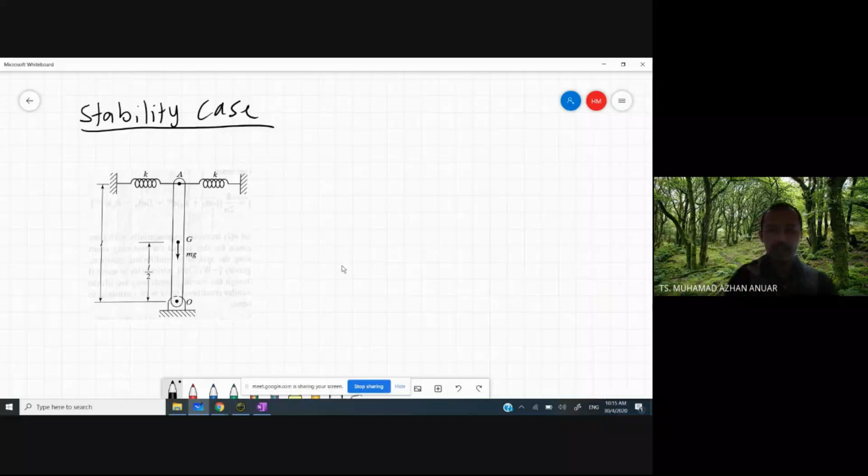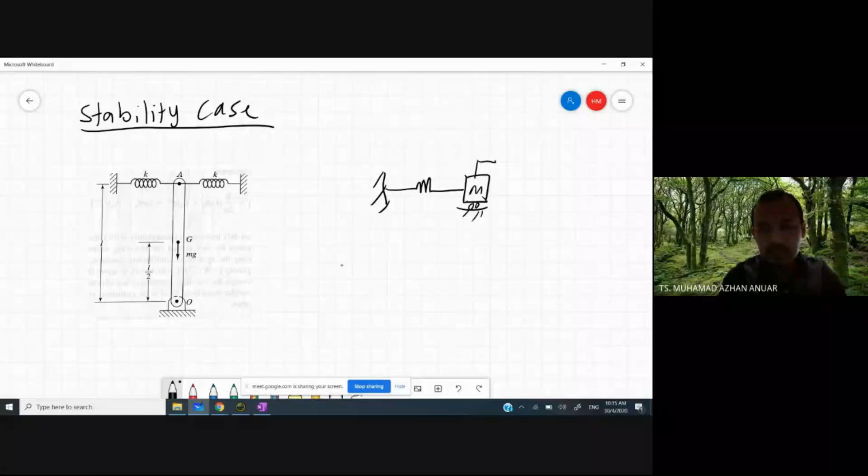bergerak. Okay, for example, if you have a spring, so let's say we know that the system is moving in this direction. For example, like this case, okay, moving to the right. This case is moving to the right.

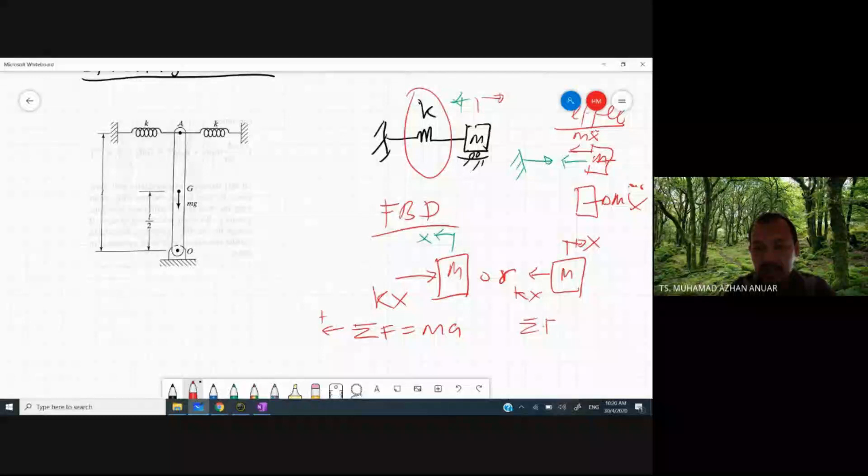So jawapan dia tetap sama, MX double dot plus KX is equal to 0. Similarly here you akan dapat minus KX is equal to MX double dot. You akan dapat the same answer. Okay, the same answer.

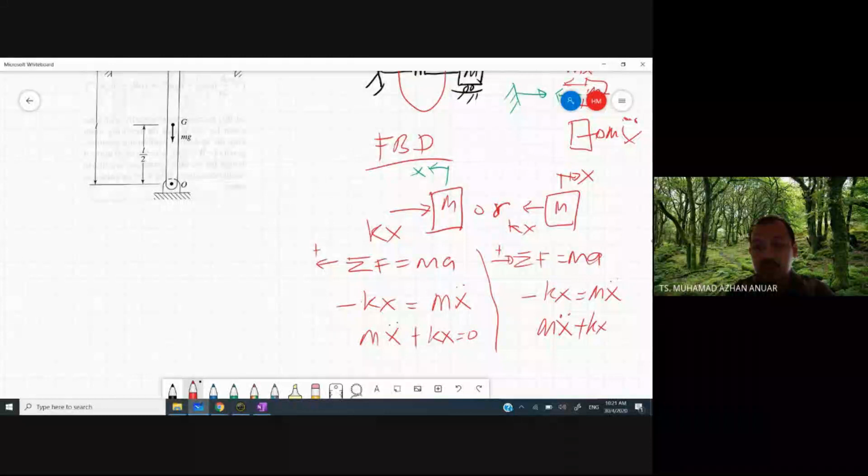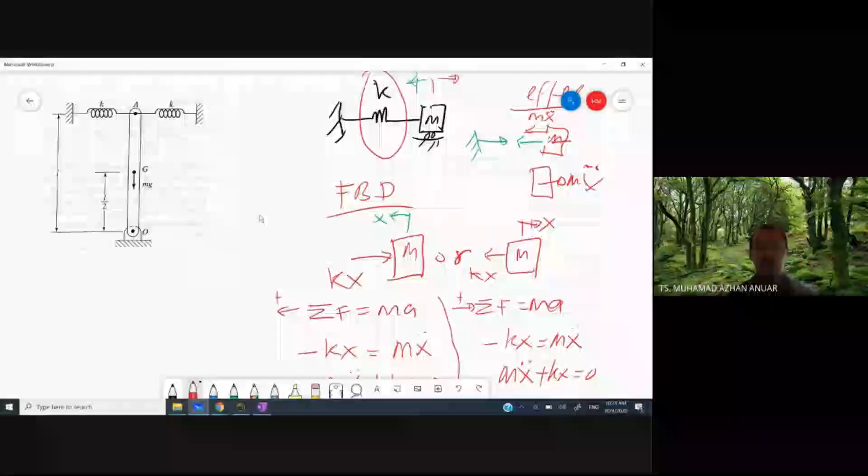Alright, so it is up to you to decide which direction ataupun this system will move, or which one is the positive direction for the coordinate system that you're going to apply for the systems. Yang itu you can decide if it is not given in the question. But if it is given, then you have to follow back the coordinate system in the question. Okay, so hopefully clear macam mana you decide.

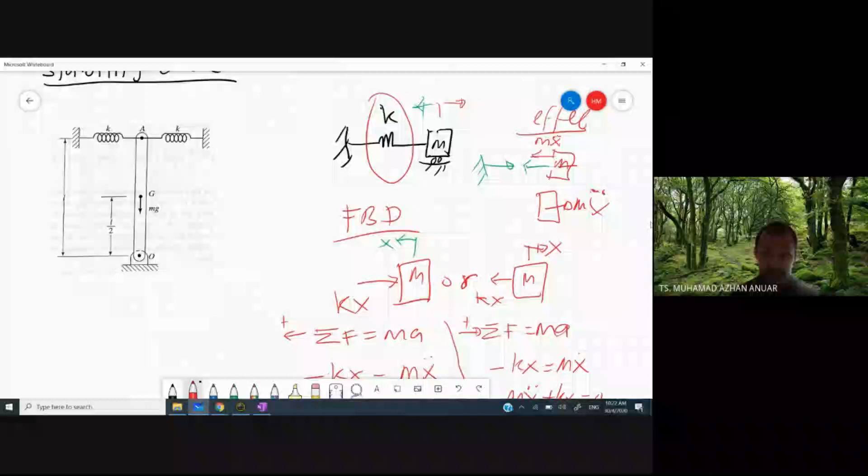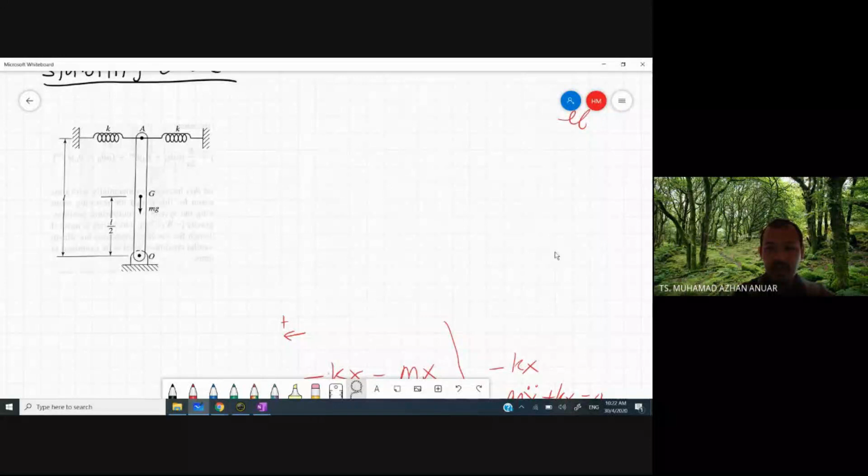For damping, it's similar. So first you tengok system tu move macam mana, and then you tengok damping ataupun spring tadi in compression ataupun in tension, and then bila lukis FBD step number 1, you draw back dia punya reaction. Kalau dalam reality dia in tension, FBD dia akan jadi in compression; in reality dia in compression, in FBD dia akan jadi in tension. Alright, so that is how we decide ataupun we select untuk draw the free body, untuk kita set the positive direction of the system. Right, ada any other question?

Okay, itu step number 1, to sketch free body diagram. And then step number 2, select the equation of motion, sama ada summation of forces is equal to MA or summation of moment is equal to I theta double dot. And then step number 3, we use step 1 and step 2 to determine the equation of motion ataupun the mathematical model of the systems.

And then step number 4, we're going to do it today, which is to get the response of the system ataupun dalam istilah matematik kita panggil to get the solution of the equation of motion. Okay, so it is similar lah. Alright, so itu yang kita akan buat hari ni.

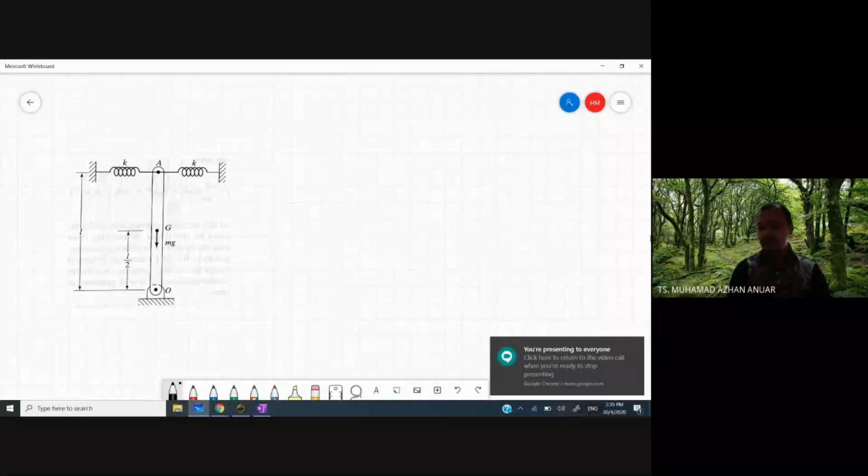So there's one thing yang saya nak mention before this, I've mentioned this before. So how we should sketch the forces in the FBD. So if let's say we have a system here. Alright, so in this system, we don't know whether this block M is moving to the right or moving to the left. So we can make our own assumption here.

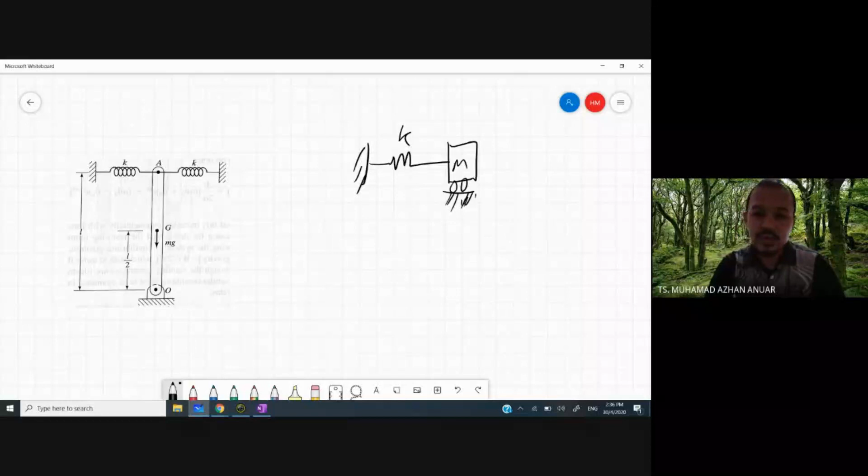So let's say we put the coordinate to the left as X, or we put the coordinate to the right, saya pakai blue color, as X here. Either one, okay? So I separate it into two sections here. If we use the coordinate system positive to the left hand side here, when this block moves to the left hand side, what happens to the spring? Spring will experience tension, correct? Compression. Spring will experience compression.

So when this spring experiences compression, when you sketch the free body diagram, you should sketch the reaction of the spring. So when the spring is in compression, it will react in tension. But for this case, when this block moves to the right, this spring will experience tension. So when the spring experiences tension, you should draw the reaction of the spring in compression.

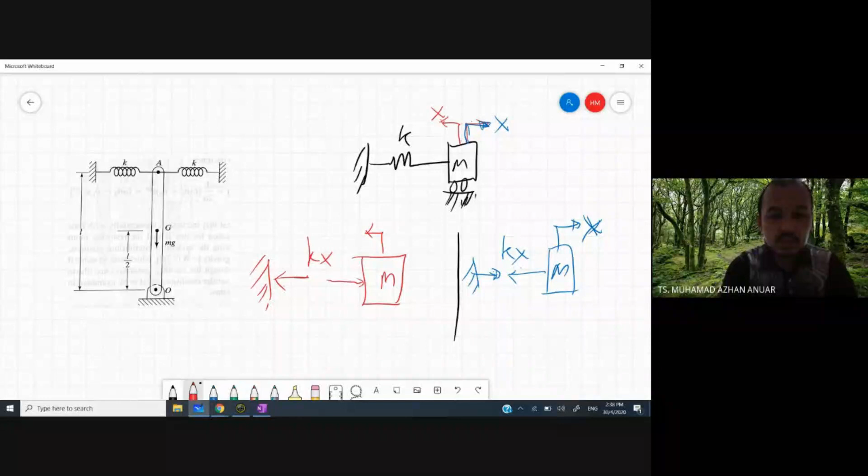So how we write the equation? So this is equal to Kx. This one is also equal to Kx. Alright, so as I mentioned before, this side we are not really interested to know because it is attached to the fixed end. So you will have this one here. This is X, that is X.

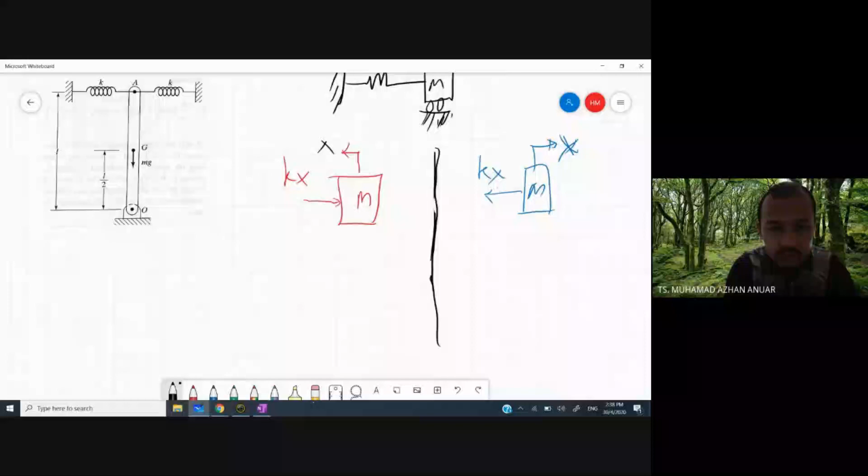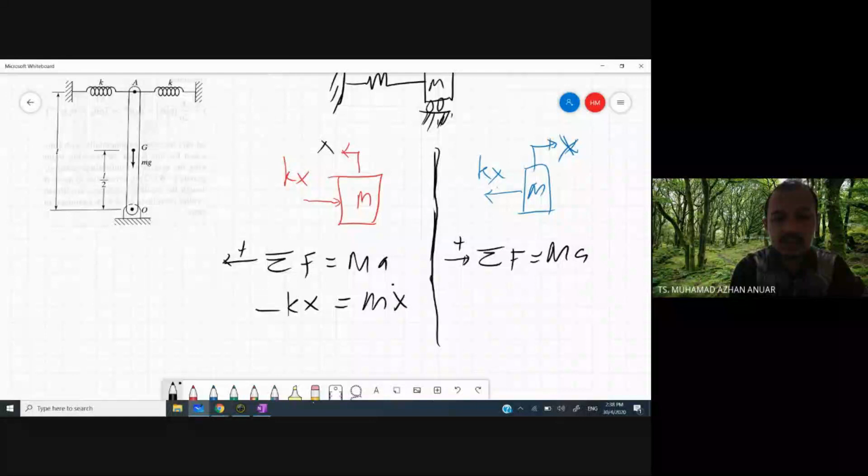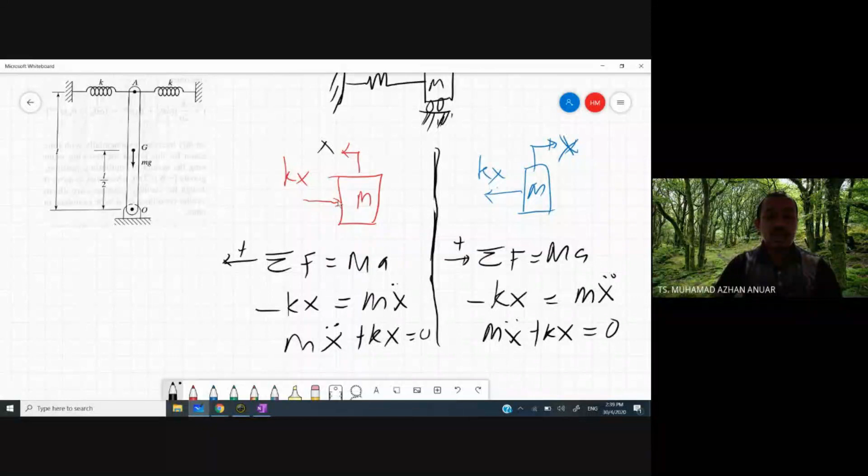Summation of forces is equal to MA, to the left is positive. This one is summation of forces is equal to MA, to the right is positive. So you should have minus Kx is equal to mx double dot. Also here you have minus Kx is equal to mx double dot. Then finally you have mx double dot plus Kx is equal to 0, and this one also mx double dot plus Kx is equal to 0. So it really doesn't matter how you select the coordinate systems as long as you apply the right reaction force on the spring.

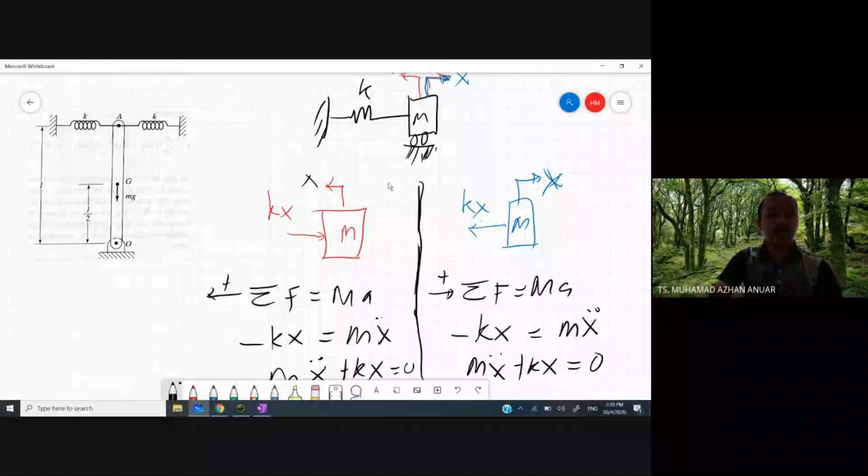If the question gives you the coordinate system, just follow the coordinate system from the question, and then look at the spring condition, whether it is in tension or compression, and then after that you apply the reaction of the spring in your FBD. Okay, any question here? Ada question tak kat sini untuk this one? Any question?